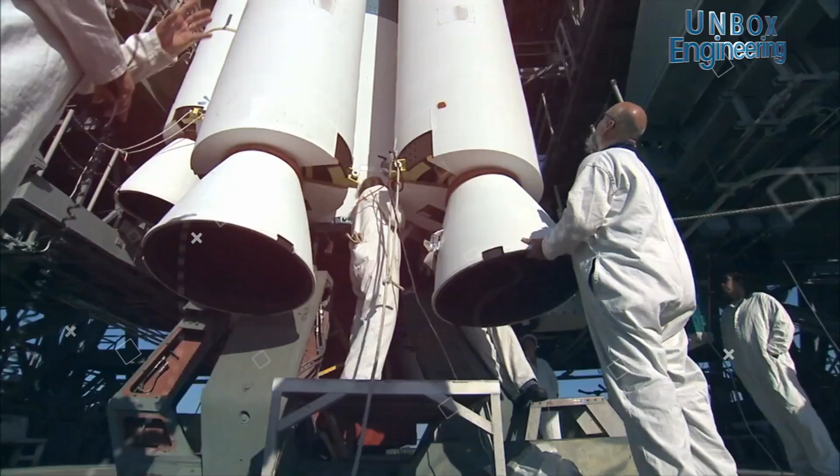When it comes to nuclear power nations, countries like USA, Russia, and India come to our mind. We all know how nuclear energy can solve the energy crisis problem at a very large level. Considering the importance of nuclear need, countries of Europe also started to build their nuclear plants after France.

So in this video, we will talk about how Finland has finally managed to solve the world's biggest nuclear problem that other countries were not able to solve yet. Yes, countries like USA, Russia and India are also not able to provide a solid solution for this particular problem. What was the problem and how has Finland managed to resolve it? Let's find out in this video, so watch it till the end.

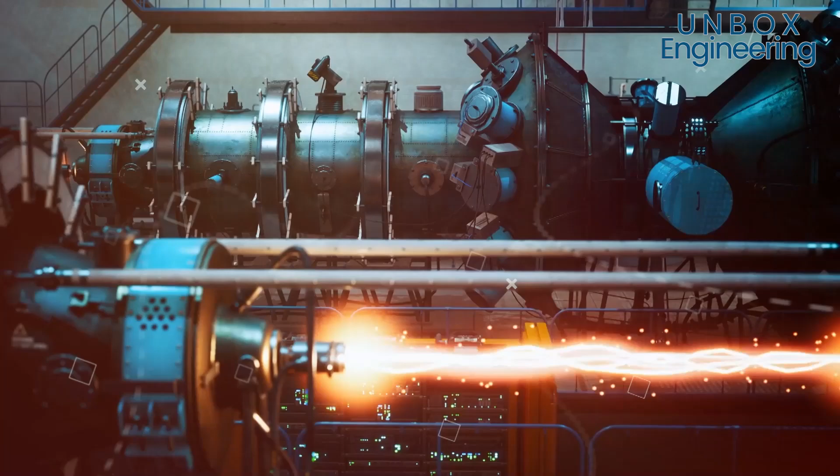When we think about the nuclear world, the Nordic nations don't come to our mind. But things have changed as Finland has emerged as the first Nordic nation to step forward in the nuclear field. It will be a game changer not only for Finland but for Europe as well, as they will stand in second position in Europe, just after France, in terms of using nuclear energy and extracting it from the nuclear system.

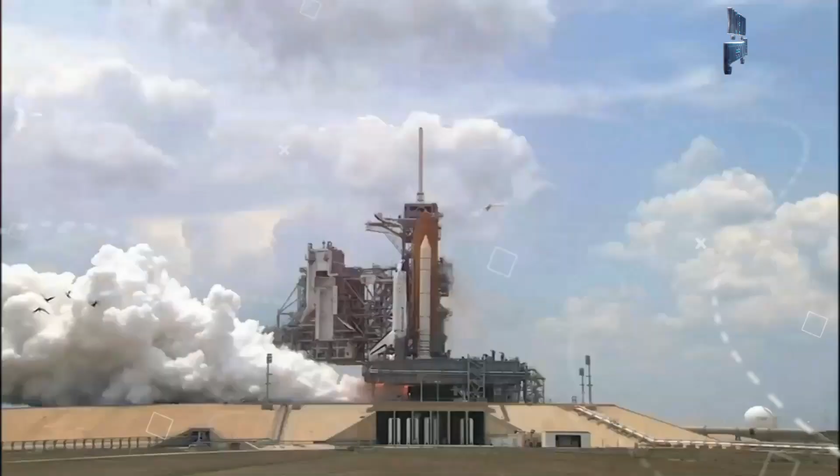Let's go back in time to when things were different. Finland has a long history with nuclear power. Their first reactor came online in 1977, and by the 1980s they had 3 more such reactors that were made to complete 1/3 of Finland's total energy needs. The reactors were among the most efficient reactors in the world, running at 95% capacity factor for the past decade, and were doing well in their life cycle.

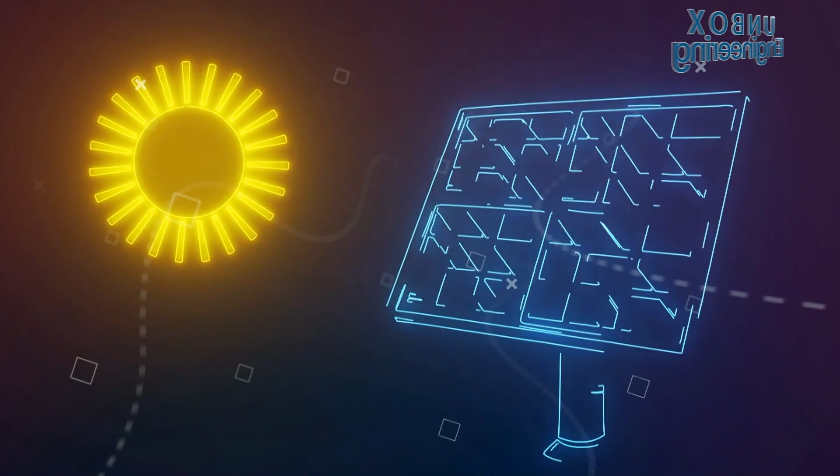Finland was so much dependent on imports from Russia and Sweden to balance their energy needs, looking at their growing demand and the depletion of their other renewable sources like hydro and solar. So, Finland needed to decrease its dependence on foreign energy. And for this, the Finnish government approved the construction of the world's first third generation pressurized water reactor EPR at its Olkiluoto nuclear plant, known as OL3, in 2005. It was built with an initial cost of 3.9 billion US dollars.

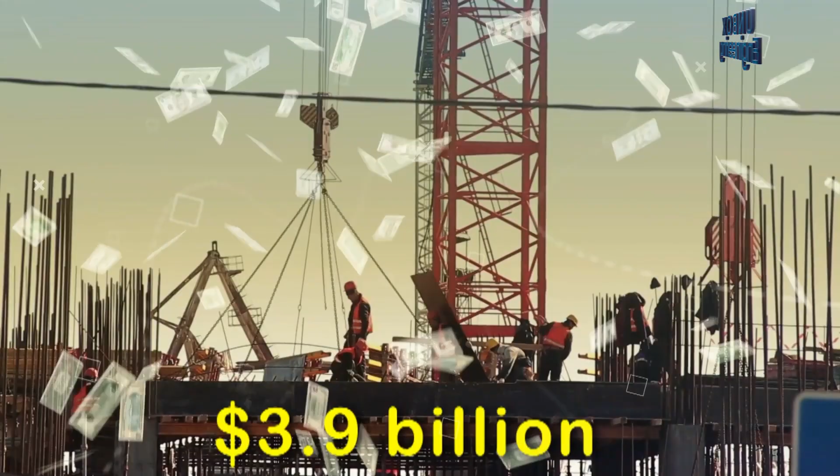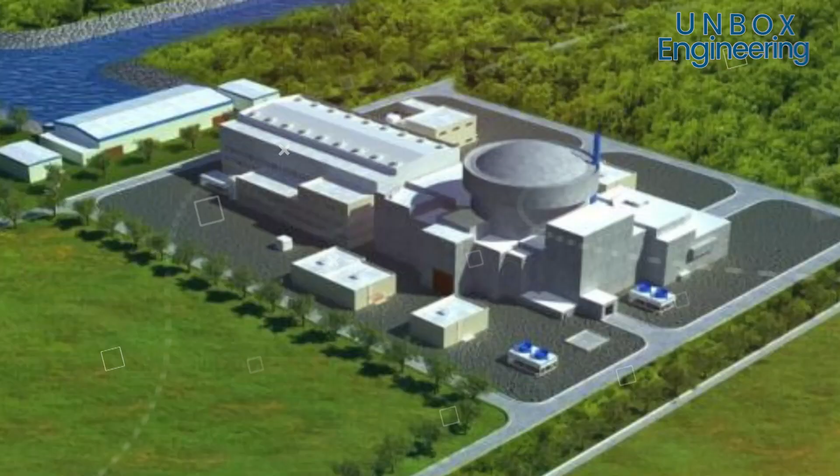After that, Finland decided to double its plant's existing output and provide 14% of Finland's energy needs after making their third generation reactor operational by 2010. But while OL3 was the first EPR to begin construction, ahead of other next generation reactors like in France, China, and UK, there were other problems as well, like its complex design, defects in the safety system, and contractual disputes. All of these led to delays of almost 10 years.

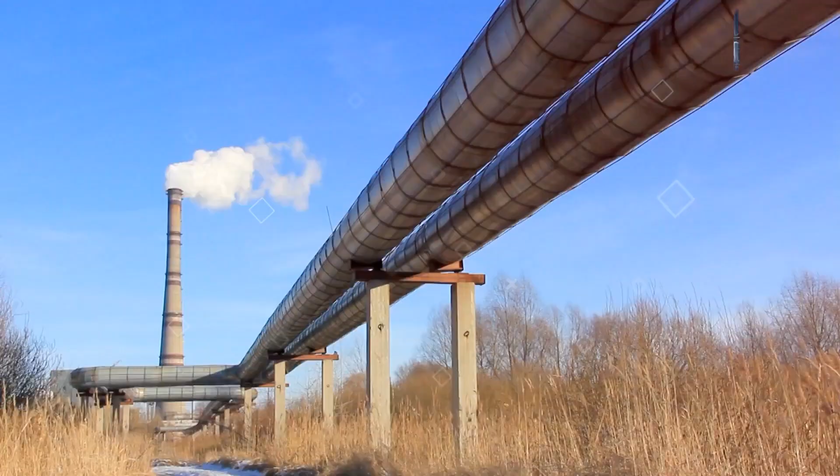After that, in 2018, China's Taishan 1 became the first EPR reactor in the world to start operating. Despite these delays and a cost of over 10.25 billion US dollars, OL3 was given the green signal to operate by Finland's Radiation and Nuclear Safety Authority (STUK) in 2019, and in March 2021, 116 tons of uranium started to be loaded into the reactor ahead of its final testing phase.

We all know that nuclear power is an incredibly clean way to produce energy, but it does create a byproduct. And it's the one problem that no other country has ever solved. After 3 to 6 years, irradiated material in the reactor can no longer sustain a reaction as a viable fuel source, and new material is needed to maintain the reactor's efficiency. It can no longer generate electricity, and spent fuel remains highly radioactive. It needs to be isolated for hundreds of years to prevent it from causing harm to people, although spent fuel can be re-enriched and re-enter the fuel cycle.

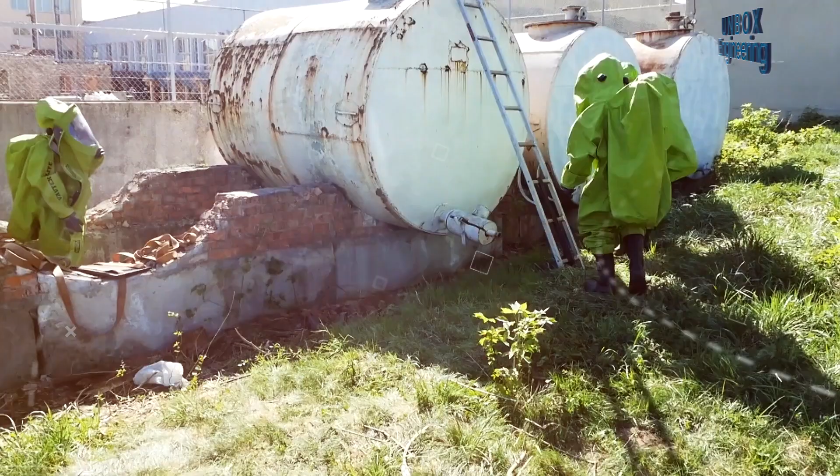Let us show you how today's countries are dealing with radioactive waste. They simply store it in sealed dry storage facilities while it slowly decays. We can clearly see that these methods are not a permanent solution for containing nuclear waste, as they require mechanical and human intervention. Here is a fact for you. With an estimated 250,000 tons of high-level waste already in storage around the world and with no long-term strategy for dealing with it, many countries have chosen to completely rule out nuclear power when it comes to meeting their growing energy needs.

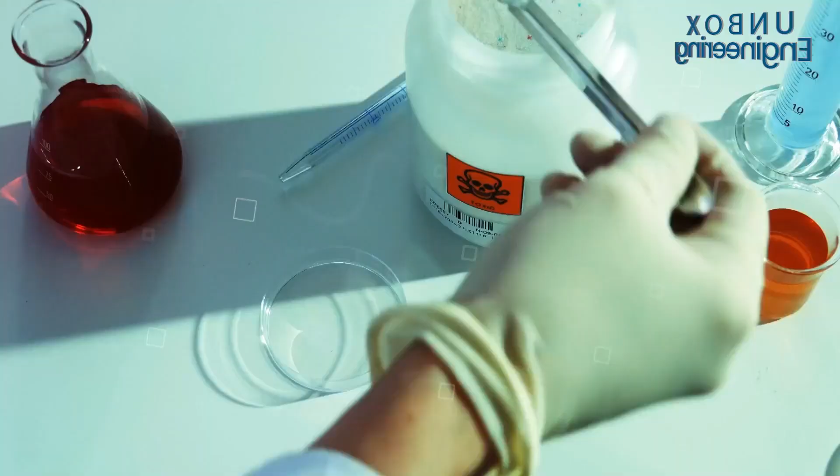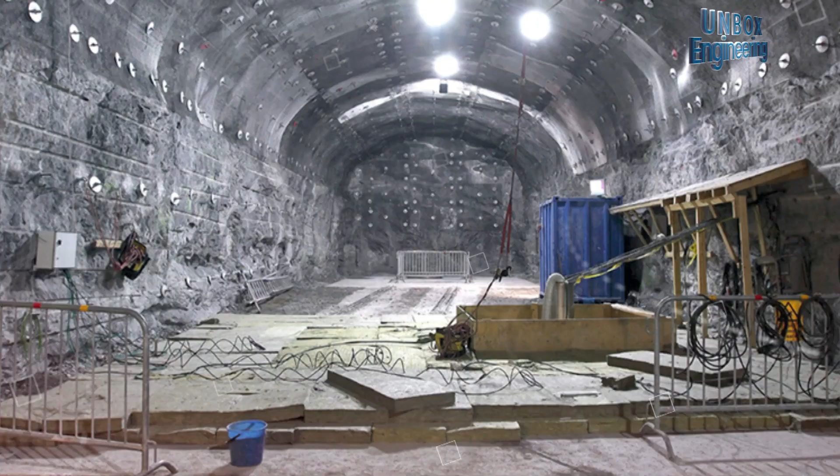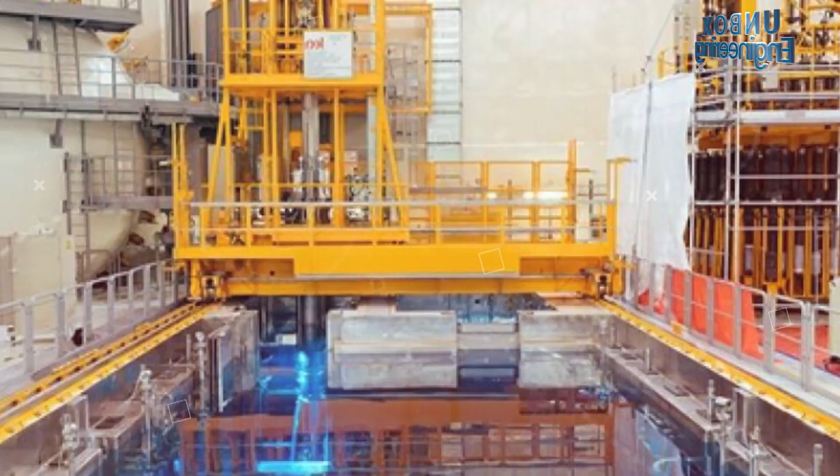To solve this problem, since 2005, Posiva, a joint venture between Finland's two nuclear power providers, has been constructing the world's first deep geological repository for spent fuel in the billion-year-old bedrock not far from OL3. It was funded by charges collected from consumers through electricity sales. This $1 billion project is to be completed in 2023 and will see a series of tunnels extend half a kilometer below ground, creating a permanent disposal facility for spent fuel.

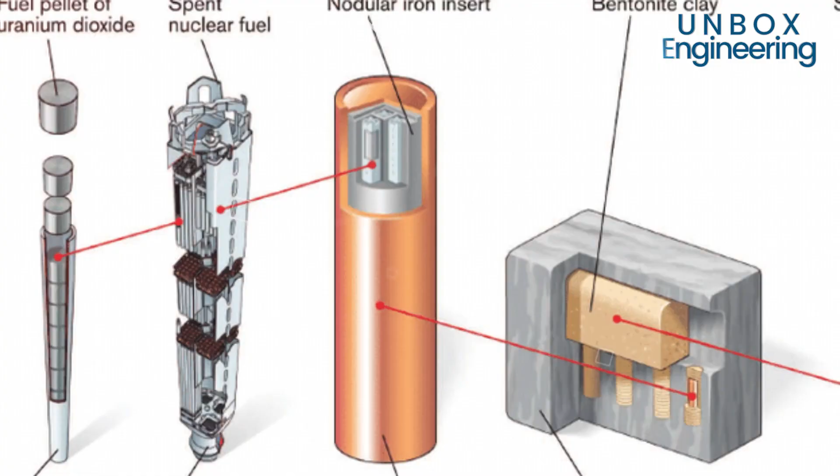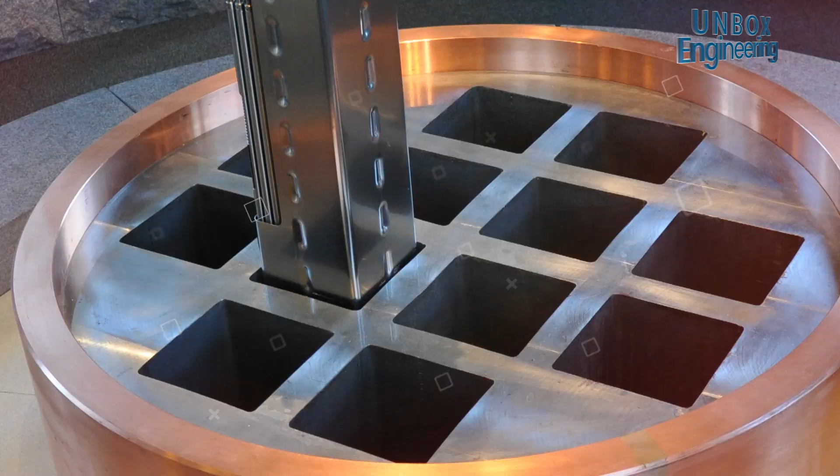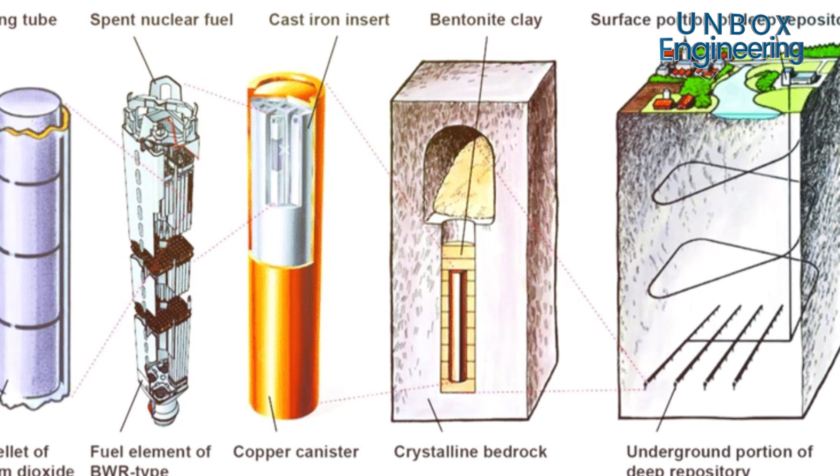It was based on KBS-3, a Swedish disposal method. The irradiated material is placed into boron steel canisters and closed within corrosion-resistant copper capsules before being buried in individual holes and backfilled with bentonite clay, entombing it forever. Once it is buried, no further mechanical or human intervention is required to contain the radioactive payload. This solution eliminates the biggest barrier that many other countries have faced when it comes to adopting nuclear power.